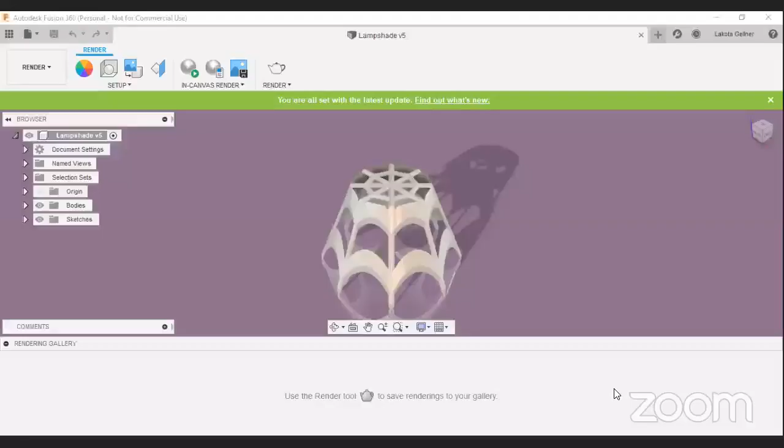Why don't you go ahead first then, Lakota? Sure. Let me try to present my screen. Can you see it okay? Yes. It looks like a crown. Yeah, upside down it does. I tried to make it look a little like a spider web up top. I was going to say it looks like a 3D spider web. Cool. Yeah, at first I was going to have just a big solid.

How big is this physically, or have you actually built it? I have not actually built it. I designed it. So what's the intended size, roughly? Let's see, I believe it's a foot tall, I think. Okay. So roughly, it's a foot by foot kind of thing. Yeah. I didn't know how big to make an actual lampshade because I don't have one for reference.

So I am curious about something though. This doesn't look like it would shade the lamp unless maybe you put paper or translucent plastic around the gap in the center. What am I missing here? Yeah, I think you'd have to put paper on. Like a shoji screen or something like that.

Yeah, I'll just explain, Eric, I'll mention the challenge. We're not actually necessarily making anything, although with some of the challenges, people do make the item. This is just to sort of get people going in Fusion, and then we just do our little show and tell, and if someone got stuck, we help them with it. Gotcha. Okay, now I understand.

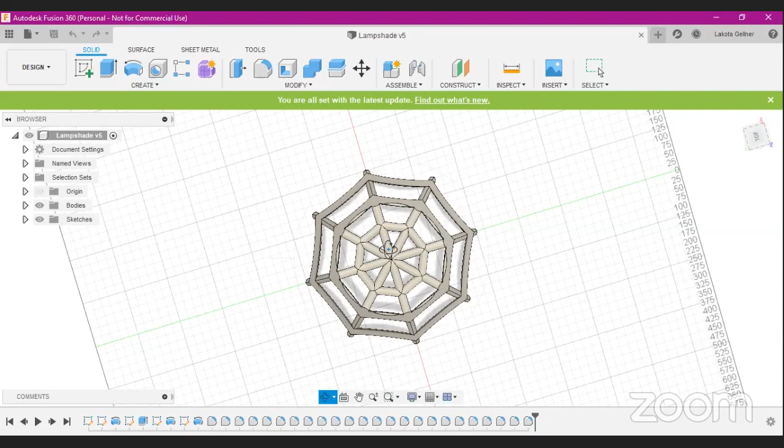You know, the other thing this looks like is the bottom end of the Eiffel Tower. It occurs to me that could be your next Fusion challenge. Cool. Yes, the Eiffel Tower. That'd be fun.

Okay, it's not exactly the Eiffel Tower. I like the shadow that it casts, though. Look, beautiful. Thanks. Lakota, I had a question. Those scalloped inner edges, what did you do to create those?

Oh, it was actually very simple. What I did, and I revised this a few times, so if I were to do this again, I'd do it in a different order. But what I did was I created a sketch up here of a spider web, which is a little bit tricky to make. I basically extruded it, and then you put spheres, and where they intersect, it creates those lines. Cool, that's interesting. I did a revolving cut too. That's a great solution, actually.

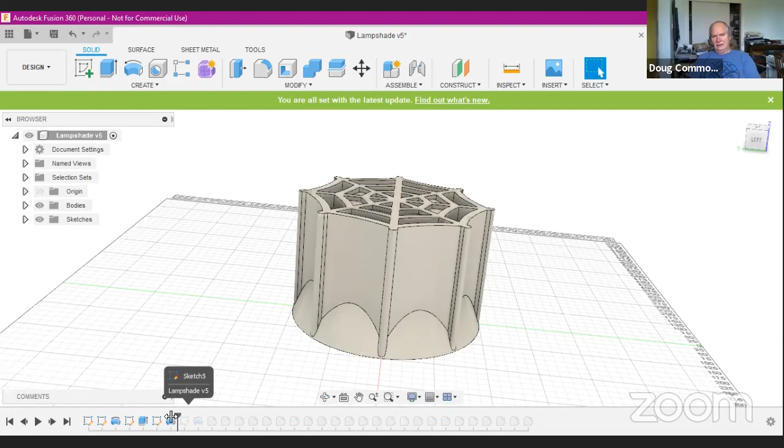So this tool is called Autodesk Fusion 360. Is this a free tool? Are we using it in free mode? Yeah, it's free. And is the idea that you can migrate design files from Fusion, for instance, to a CNC milling machine or a 3D printer at the push of a button? So is that the design methodology, the tool flow, if you will, that you guys are thinking for a newbie like me might be suitable, or is that too complicated?

Because I've been using Google SketchUp up to this point. Well, there's a whole debate on that. I think SketchUp's a good starting point. But if you're doing 3D printing, you can go straight from Fusion to 3D printing because there's a really good post processor that is almost seamless. But there is not one for the CNC milling? There is, but it's complex. It has so many bells and whistles. It's just a lot more complex.

It does sound like this is my kind of group. Good call, Darcy. This is exactly what I needed. Kindergarten for idiots. No, that's great. So I guess, beautiful, Lakota. I think it's nice.

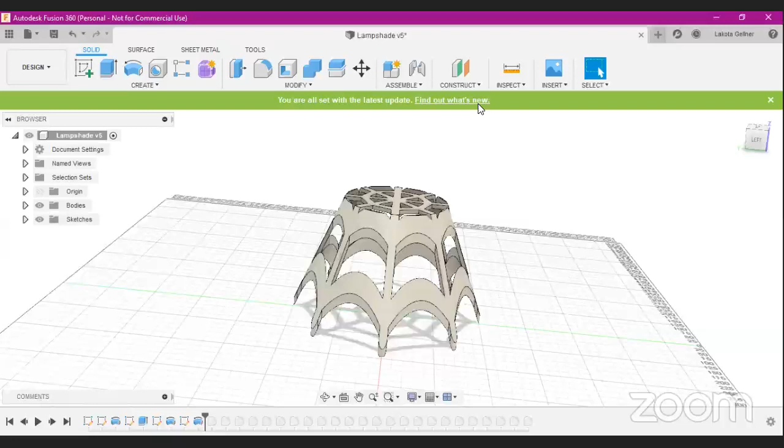So who's next? I think Isabel said she had one too. If she's there, I don't know. No, I didn't have a chance to make something. Sorry, I didn't mean to put pressure on you. I thought I heard you pipe in. Sorry, my bad. No problem. Way to make people feel welcome, Doug. I know.

Well, Dave, do you have your rocket ship shaped? What's the very top of the rocket, the emergency escape system? That could be your lampshade. So for that one, when I drew it, I actually did it in FreeCAD, not in Fusion. And it's complex enough that I didn't draw it using any of the drawing tools. I wound up writing a Python script that calculated the vertexes and stuff like that. I looked at drawing it through manual processes, and it was just going to be horrific amounts of work.

You can do that in Fusion as well. I've not had need to do that particular one in Fusion, but maybe I'll give that a go this week and I can show you guys how that's done. Because I have written some macros for Fusion. I've got one that generates nose cones, for example, which I had in FreeCAD and ported over to Fusion, so that was pretty straightforward.

So isn't the nose cone like a revolution, you just draw a Bezier and then rotate it? Yeah. But the Beziers have specific shapes, and that's really where the macro came in. You can have a simple cone, or a spherical, or the ogive, there's a lot of different shapes, and they're optimized for different speeds. So there is a reasonable amount of theory. I didn't have to get into the theory. I just went to the Wikipedia page. It showed me all the formulas.

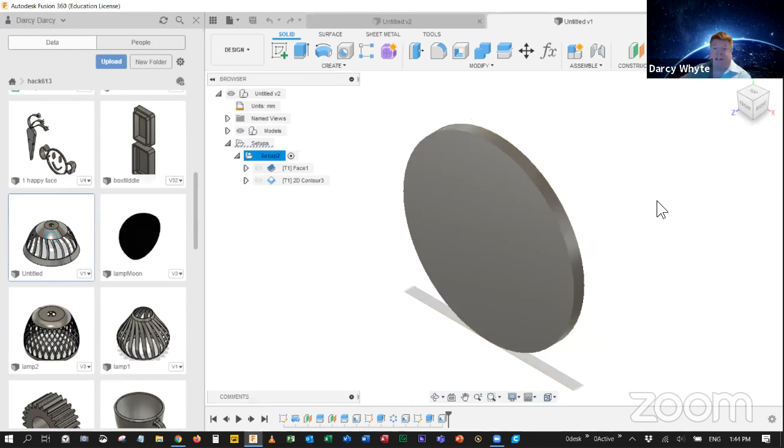A special friend. Yeah, so that was the first challenge. And then we did a dice. I eventually did this lovely one. And then we did a mug, and I did that. A gear was talked about, so I did that. And the lampshade is the one in question for today. And I think this is it. My secret project is a moon lampshade. But so here's my lampshade. I guess that's the latest one. This one looks 3D printable.

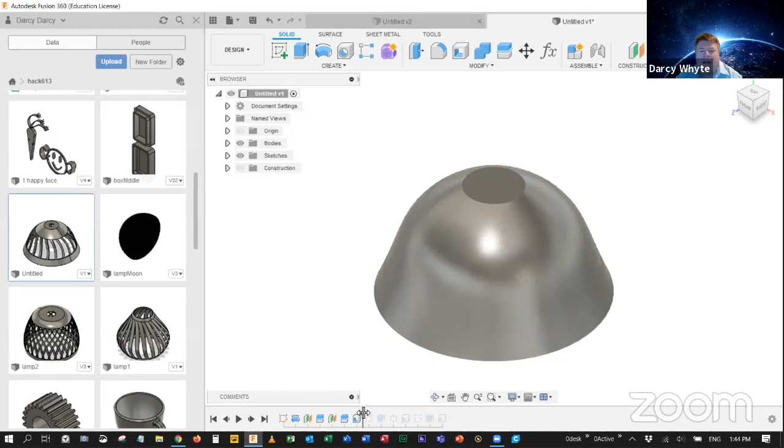So I'll just move the history back so you can see the steps here. So I started with that. And I made this by sketching and then just rotating, revolving. And then once I did that, let's see if we can see something that shows up here as I move through. Okay, I shelled it to make it empty. And then I did an extrude.

You can see I did this sketch right here, or I'll have to double click that sketch. I did a sketch like, and this is based on a tutorial I found on YouTube. So I just sketched this on a plane that slices it. And then I'm going to extrude this thing out. And you can see, if I finish the sketch, when I move to the next point, you can see that I've extruded it like that.

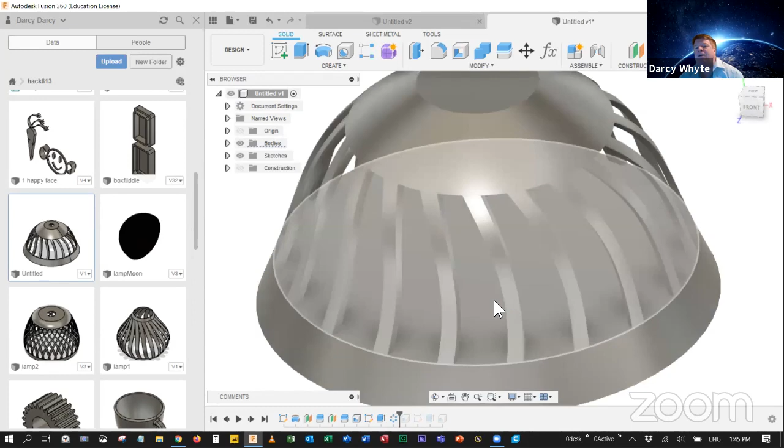And then I did a pattern of that. What's this thing called here? A pattern. And I just rotated that thing around. And then looks like I shelled the top or the bottom here and kept going. And yeah, anyway, that's the deal. So looks like I made a hole at the bottom. Is that an extrude? Looks like I shelled the bottom to get that. So that's how I made mine.

So I started by revolving to get a circular thing. And then using extrude, I made a pattern. And several YouTube videos demonstrate this technique. So I have a question there, Darcy, and I've never used 360, but do you have control over where the light source is in the rendering? I don't know, are we seeing that here yet? No? Yeah, I don't know. You must have control over that.

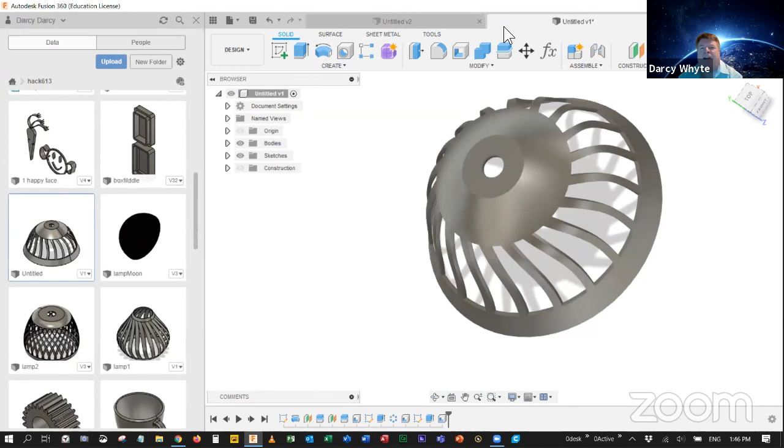Well, one of the things is when you start your sketch, like if I did a new sketch here, when you start to do your drawing, you usually start with this button over here, and you pick a plane. So even if you couldn't control the light, which I suspect you can, it's just a matter of how you orient the item that you're doing. Oh, I see.

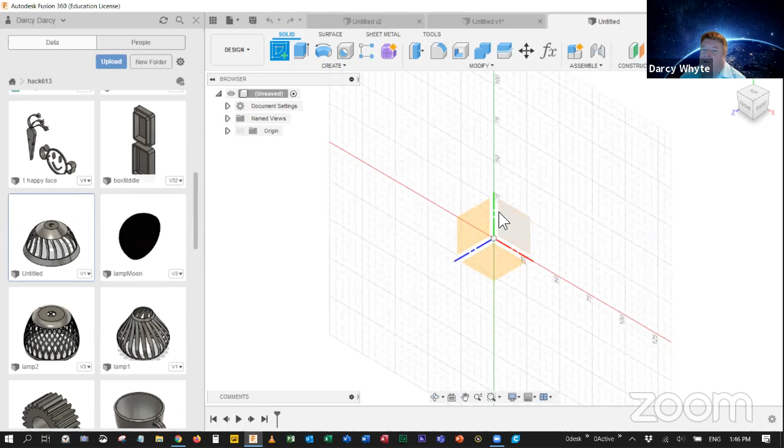And I made a pattern of just starting here. And I don't know if that's a good idea or not, just because I was in SketchUp before, and I'm just used to going to school and the teacher draws an X and Y on the board. So I want an X and I start drawing right here, you see? And then maybe make a circle like that. And then I'll pick solid, extrude, and extrude that into an object. And so now it looks like Z comes out. Yep. And the XZ plane is the floor, it looks like to me.

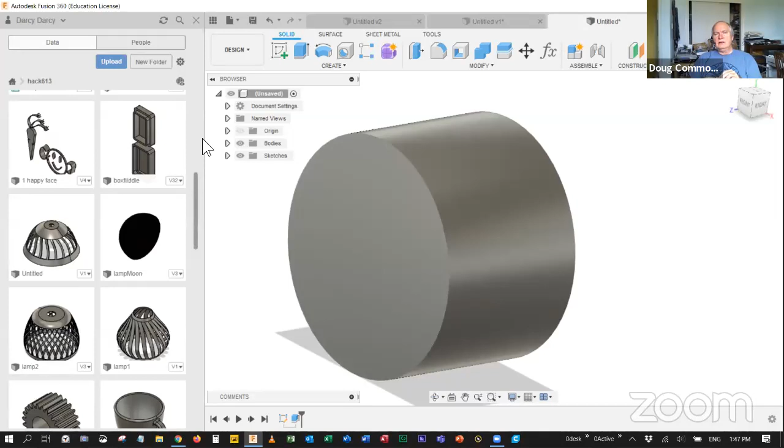So I don't know the answer to that. There is a way to do this because I've seen some really cool pictures come out of it, Dan. I think what we're looking at is the CAD part, but then there's another tool that you can pull up, and it's under design, I think. The design button up there. I'll be doing a little render later, Doug. Okay, let Ray do it. Ray's way ahead. I'll let Ray have the floor then.

Quick question. This Fusion 360, I was just checking on the web. It sort of implies it's cloud-based. Do you actually run it on your machine or is it running in a browser or something? A bit of both. It's kind of a hybrid. If you're generating forms, then it'll be in the cloud. But some of the more rudimentary stuff is on your computer. Some of the really heavy stuff, your computer won't handle it. Oh, really? Okay. But you'll be a while before you get to the heavy stuff, presumably.

Well, what I'm getting at is, do you actually download and install an app on your computer, or is it all running inside a browser? Yeah, there's an app. And it seems like it was saving to the cloud. Yes, it saves in the cloud. Is that the same for the local save? The local save self-deletes in like 60 or 90 days or something. I noticed you can export, they call it archive, and it saves a local file. But I bet that will be your own problem to manage in your own file system.

I don't trust Autodesk as far as I can throw them. I'm reluctant to invest time learning that tool. It's just one of those things. We all have those feelings, but they're offering so much. When you get into it, you can make some interesting things that we were finding challenging before. So they can take all my files away and I'm still ahead.

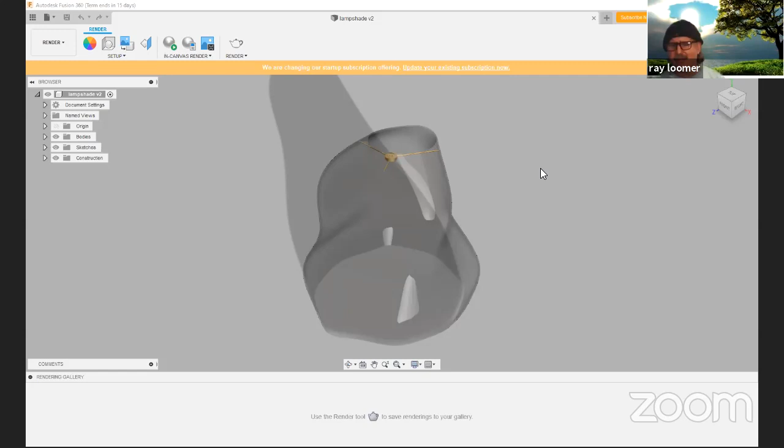Is this supposed to be a lampshade shaped like a potato? What's the shape that I should recognize? I sort of went with an organic blown glass shape. And I used a different set of features than most people use. So instead of walking you through this, I'm just going to start with a new design and show you what I did. I used a different mode. I used the form mode. So I clicked here, and I picked cylinder, and I picked a plane.

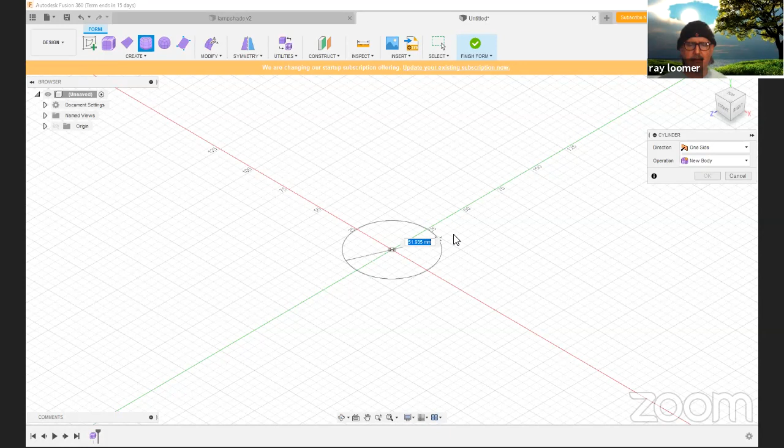So what I have is basically the idea of the lampshade right there already. So I can adjust this width-wise. I can adjust this height-wise. And if you see this little thing here, I can adjust how many segments it has, which is kind of important. And I can adjust the segments this way as well, because every segment, every intersection, and every line is manipulatable.

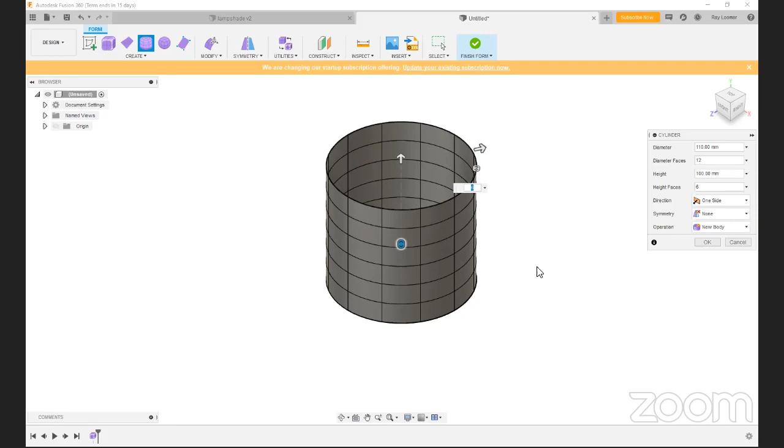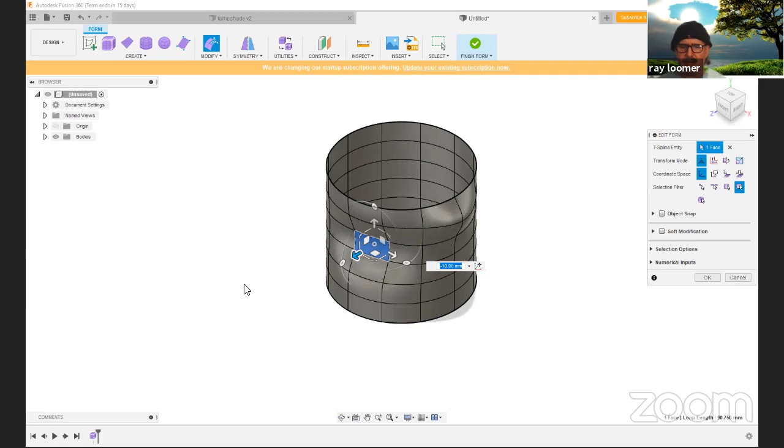Right. So then you start tweaking all the intersections to get whatever bizarre shape you want. It splines the rest, does it? Right. So this is actually just right click, edit form. I pick something and I just pull on it a little. Gotcha. Or I pick a whole plane and I push on it a little. So I end up with like a blown glass shape, very easy to do. Or I pick a line and I pull on it a little.

And there's a lot of modifiers, like crease. If I put crease on this one, and then I edit the form. This feature should be called "How to Make Something Brand New Look Dented and Old." Yeah, this could be a pop can that's been around for a while. But see, when I put the crease modifier on it versus this one, it's quite sharper. So there's a lot of different modifications that I could do.

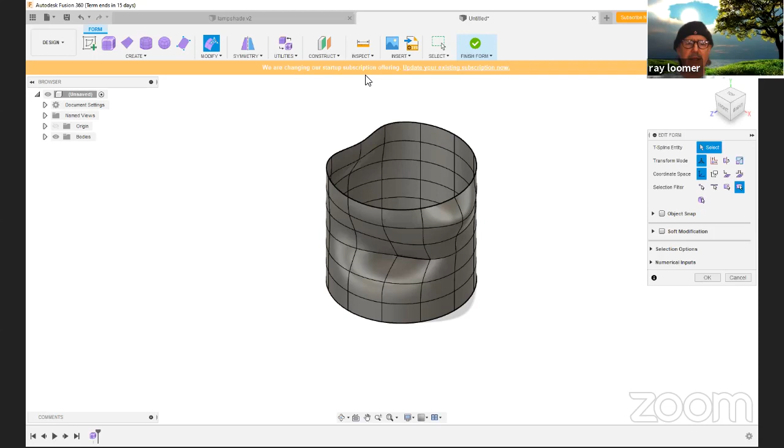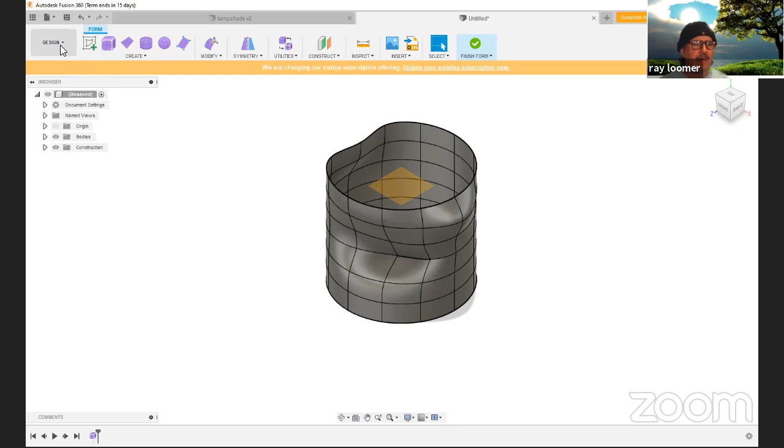Then I did the offset plane. Again, offset plane, brought it up. Did my sketch here with the 3 bars and the hole in the middle. If you want me to go through that, I will, but I think that's been covered in some of the other ones. So this is a feature that people don't usually use. And when I go over here to design, I can go to render. And I can, well, actually, let's go back to design.

So I can go into modify and go to appearance. Come on, here we go. And one of the appearances is glass. And for example, I could just give it glass. Use that. So presumably that's supposed to be glass, but anyway, that's better looking glass. So all I did is I just modified it so it looked like a big blown glass lampshade. Now, I'm going to start a new design again.

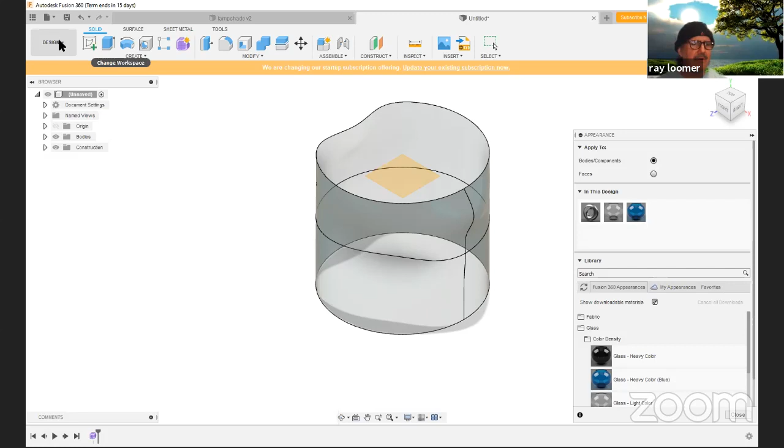The interesting part about this is if you want a box for something, you could just take like a box. You're making a box for whatever device that you have inside. Okay. Something's happened. Try that again.

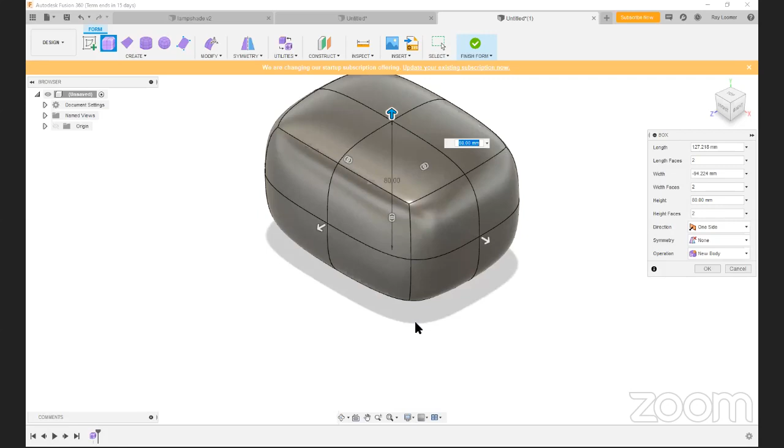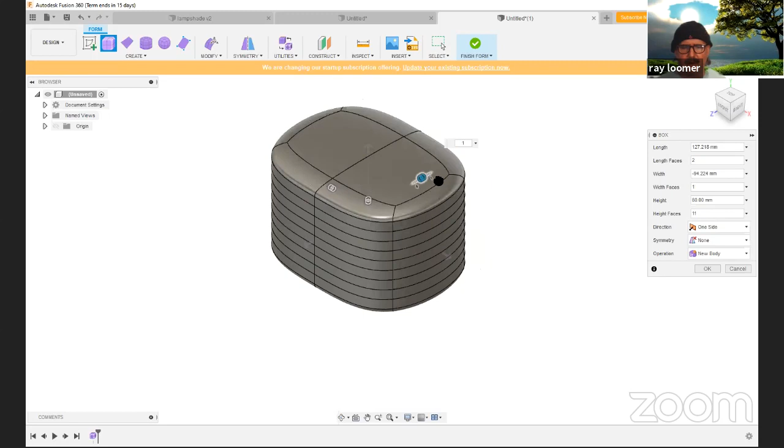So in create mode, you end up with a blob when you pick, but you can make it almost a box by increasing the number of segments. Mm-hmm. But if you really wanted a box, then you'd probably stay in the regular design mode. But you can get organic shapes. If you make something and you want a shape that fits around something, a shell, then this might be the way to go. And again, you can modify this.

Oh, come on. Oh, wow. It's a stick shift. An anvil. An anvil. Yeah, or an anvil.

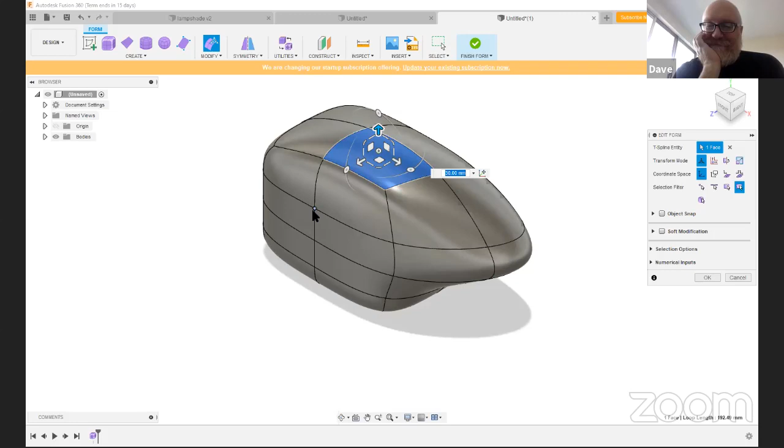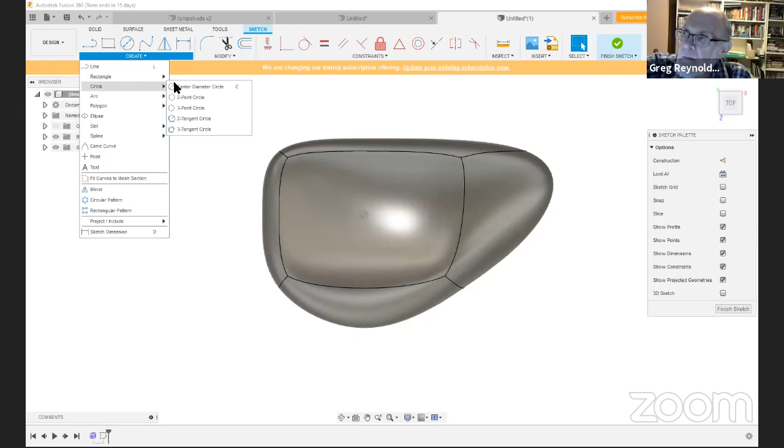Yeah. But then you can finish form. And what this does is it creates a body and you're back into the design. So you can do your normal stuff like just create a sketch. Say center circle. So now you've got this hole through it. So it's just another body where you've created a very organic shape.

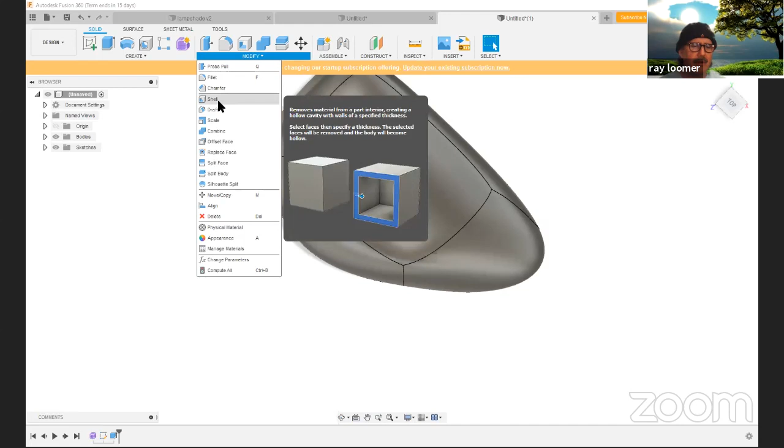And so you can create a box, or if you use the shell command, where is that? Here. I'll pick the hole itself. And now it's hollow. So that could be like a box for a piece of electronics or whatever. You could 3D print that and it would fit around. It's very slick. It has a great presentation overall. You put the holes where you want them for the knobs or whatever. And I think that's printable and you could do it in sections. So I thought that was an interesting feature to bring forward. Yeah, for sure. Awesome.

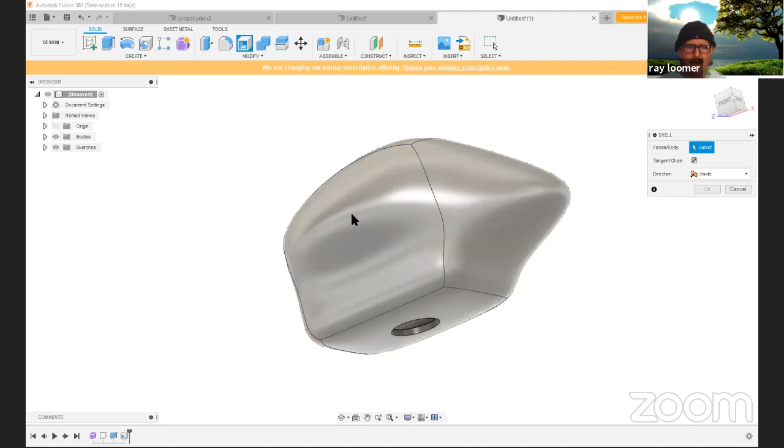What about more complicated things? Like, could you put threads into that hole? Yes. Ray, where'd you specify the thickness of the object? In shell, modify, where is it here? Oh. Up. Up. Yeah, there, it's the first one. That's why I didn't see it. So I pick a, okay, let's. And it's just asking you to type in a number there. Oop. Okay.

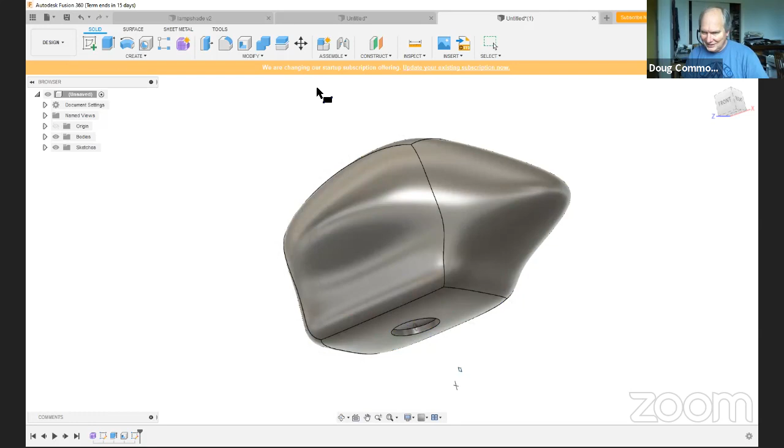Yeah, okay. Modify, shell command off of this end. Okay, see, as soon as I click on the surface, I have that little dialogue. So, okay, right. 2 millimeters, it'd be 2 millimeters. Okay, wow. 5 millimeters, it would be 5 millimeters. So really, really quick. And I can pick more than one surface. And so then you can have multiple holes going in. So it's a slick little trick.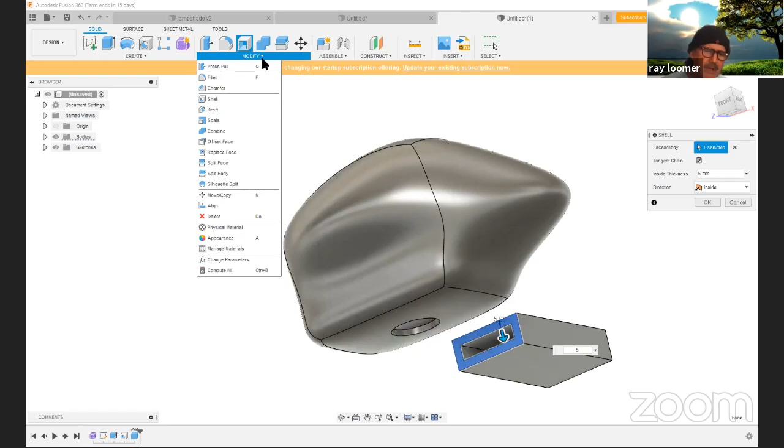And someone asked about threads. There is a thread thing. Let's see. Also, when you do hole, you can do thread too. Oh yeah, there it is, thread. Okay. So you click on thread, you click on the edge. Whoops. And would those threads be 3D printable? There's two different ways to do it. You can just have a decal on it showing a thread, which is good for some applications, or you can actually have the 3D printable thread, the actual thread in the design.

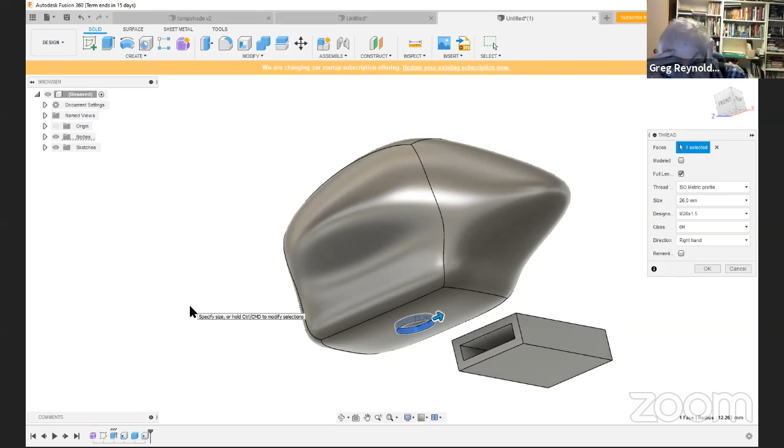So there's two. Yeah, there are some good YouTube videos out there for creating 3D printed threaded parts. Because I was thinking as well, if you dimensioned it correctly, you could maybe clean it up with the real tap afterwards to get better quality threads. Well, for fine threads like that, you're probably going to be disappointed because 3D printers don't have the resolution. In that case, you're just going to cut a hole and then use an actual tap. Yeah, exactly. But at least it would be close, and you wouldn't have to be removing so much material, or if it's in a difficult place, maybe to be able to tap it.

Yeah, another common thing for threads with 3D printing is you can get brass inserts, and you use a soldering iron to put them in because it heats the plastic just enough. That gives you a brass piece that's going to hold your thread, so it's a lot more reliable. And I guess they're reinforced on the outer edge so that it has a good physical grip to the plastic. Yeah, I use that on my rockets all the time because I have the electronic sleds that hold the electronics to control the rocket. And for those, I use the brass inserts because I don't want those things flying around.

It's surprising though. Oh, sorry. But the 3D printed threads work better than I would have thought. Yeah, it depends on your application. I got some right here. See, I made this thing just yesterday, and you can unscrew this piece, you see. So it's really sloppy, but for this application, it's fine. Right. It really depends.

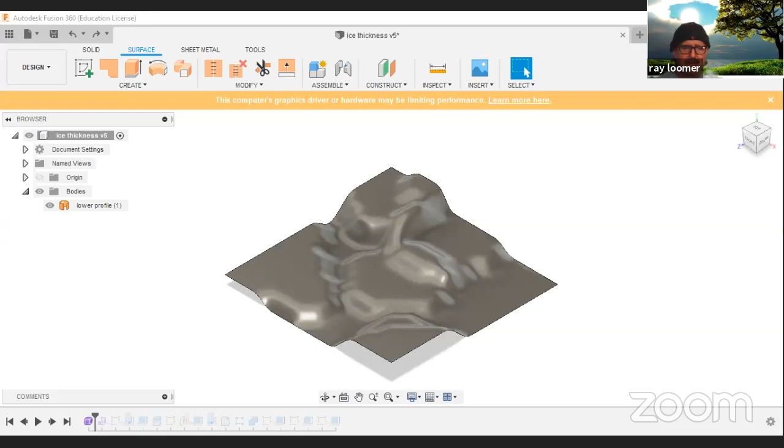This one that I'm showing, I had to make a topographic map. And I used the same tool. So I work in science outreach and science education. We were making a science kit for high school about climate change and measuring the ice thickness. So we wanted to simulate the surface of a lake, with a layer of water and then a layer of ice on top, and how you would extract a cylinder and how you would measure the ice thickness.

Yeah, so it's the same tool that was just shown. So I started with a grid like that, and then I pulled up some parts to make different thicknesses. I made this a while ago, so I won't remember all the details necessarily. Then I did another one.

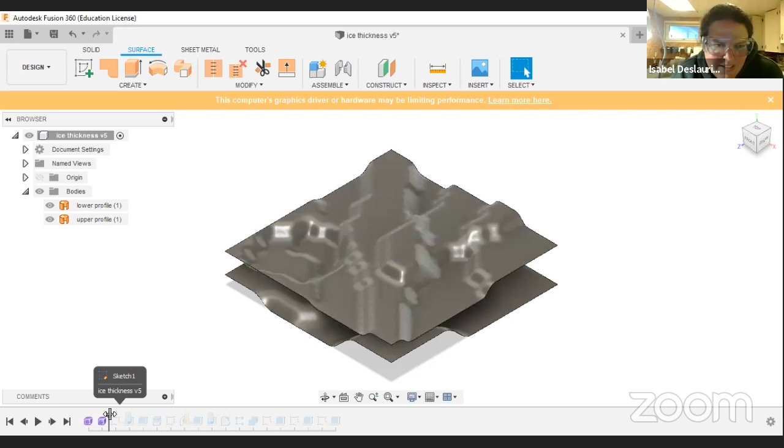Whoops. Spoiler alert. Yeah, so I made another one on top, so I'll visualize it like that. Let me show after. Then a couple extrudes after, so you can see the bottom was supposed to be, like, I printed it out blue for the water, and then the top part was white. So the kids couldn't guess. Like here, it looks like it's very thick, but maybe the blue part is very thick and the white part isn't as thick. And then I started to work with more of the standard tools that we know.

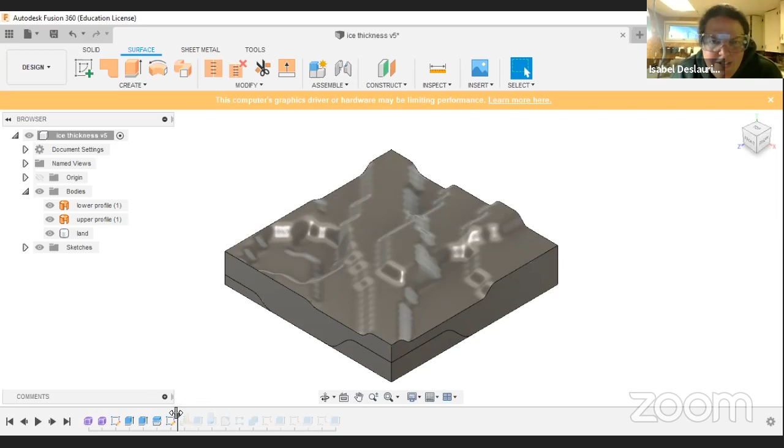So I made little pegs sticking out and a cylinder that cut into it. Yeah, so I ended up with these. Let me turn off a few bodies here. So you can see I had these little bodies like that. I kind of forgot what I named what, but you get the idea. And I numbered them. So let me turn back everything.

So at the end, you ended up with these 9 little cylinders that you could pull out, and you could see the different layers inside of different colors. And they were supposed to find what's the safest path across the ice based on those cylinders that they pulled out. But for me, that was really the project where I learned a bit about that different environment that Ray was showing, because you needed that organic shape.

And you actually printed these? Yeah, hundreds. How long did that take? Because you're using different colors too, right? Yeah, so there's 2 offices that work for the same organization that also have a 3D printer. So usually I design it and then we distribute it across the offices, and different people print different parts. But it must have taken, I would say, 3 weeks.

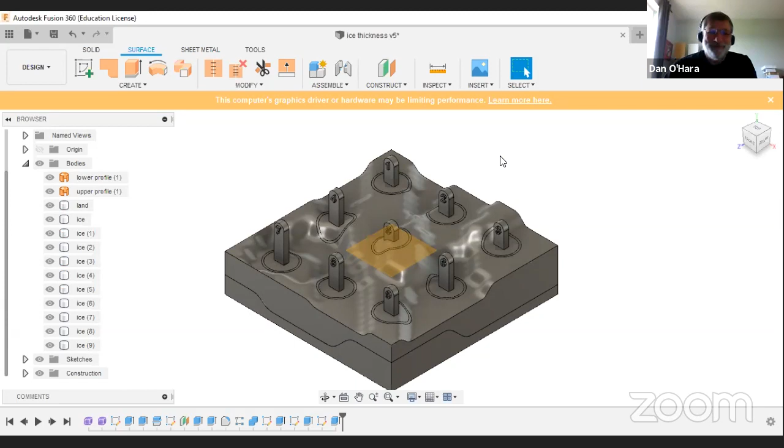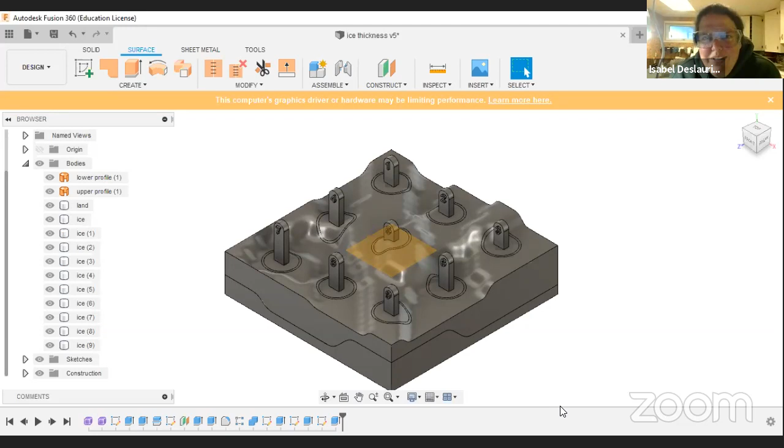Wow. Yeah, but it's really nice for some of the kids that we do in schools. The original idea that was proposed by the group we were working with was to do this with a bowl with water in it, and then you put shaving cream on top, and then you take a sample. It sounds like a good idea, but thinking about the practicality of it, we could just see how much of a mess it's going to be. So with 3D printing, we've really been able to do a lot of custom educational stuff like that. Anyways, just another quick example to show the relevance of the tool that was just shown.

Very nice. Oh, that's awesome. Isabel, what grade was this? We did it for grade 10 to 12. Oh, okay, high school. Oh, wow. Yeah. But in general, it's from preschool to end of high school. So it just depends on the topic.

Beauty. Any other show and tell or calls for support or help? I'll take that as no for now. Feel free to interrupt if something comes up soon.

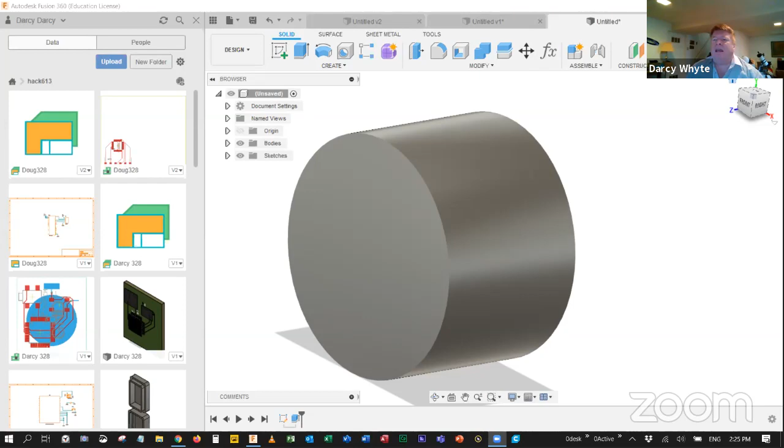Okay, so I'm going to share my screen now so that you can see a picture. I'll just put this aside for a minute and compare a couple things so you can see. I'm making this as a broad recommendation that it's an affordable machine that anyone could start with. So I go into my printmaking here. I did this project the other day for fun with this in mind. I made a thank you card, and I was showing it during our social earlier. In the design file, I used Inkscape, as you can see here. It's just popping up. Did I double click it? Yeah, I guess I did.

So this is a nice, good sized desktop machine. It's called a 6040, and that whole box I just selected is a 6040 size machine. I've got one of those machines, and I'll show it right now. This is a 6040 right here. See that thing there in my other camera. There's one more size after this that you can fit on your desktop, called a 6090, and that's almost a meter of cutting area.

And now here's where the rub comes in. A good 6090 is about $5,000. You can get a low end one for say 3,000 or something like that. No one wants to play with that money, and it's a massive machine. You can't pick it up by yourself. Even this 6040 I have, I wouldn't pick it up myself. I've done that before, a few years ago, and I'm still paying for that. So anyway, that's a 6040.

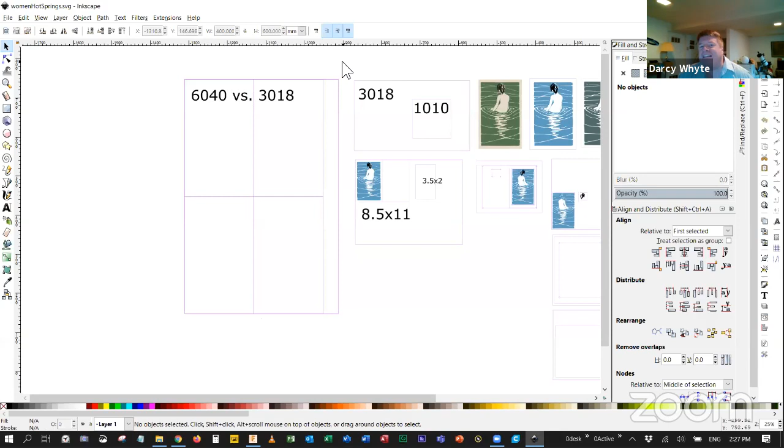And there's the 3018 size we're talking about right now. It's like a quarter of a 6040, right? So that's the work area we're talking about. Now, the reason this machine is so nice and light is because the smaller you make it, the lighter it can be. It goes up exponentially, or with the cube, I guess.

Because when you imagine, if you make the machine longer, then the members start to eventually bend under stress. So you've got to make them bigger, but not proportionally bigger to the size you're making it. This thing gets heavy. Like this 3018, I can walk around. I can carry 2 of them just in one hand by putting them together, grabbing the 2 beams and walking around with it, no problem.

By the time you get to a 6040, you need 2 people minimum, and a 6090, you need 3 people to lift it, because you're really working when you're lifting these things. So this size is just such a nice size that it becomes portable.

And other common sizes. So 3020 is another size, and oddly, those machines are usually made very heavy. I had one that weighed about 60 pounds. I don't know what my 3018 weighs, but it sure doesn't weigh that much. And it's plenty rigid. I think you could do aluminum on this thing, plenty hardwood or anything like that, as long as you're not too greedy about how fast you want to get things done.

Another common size is 3040. They're also a good buy. I think the 6040 and the 3040 are two. The 3040 is about the biggest you can lift up by yourself. That's just designed for one person to carry.

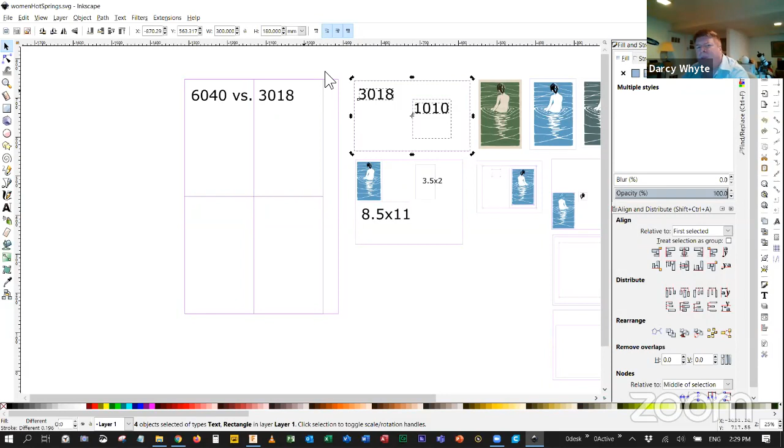So anyway, that's sort of the size we're talking about, and that's a limitation of this machine. At 3018, you're going to be limited to what you can get into that machine and cut. And that's just one of the payoffs. If you want to go bigger, the weight and the price just goes up with the cube of the size, basically.

And what's an example of what you'd need for those sizes? On the 3018, could you not just take your project and build it as smaller parts? Absolutely, just make it in parts, right? Where would you have to have a 6040 in order to do it, where you couldn't do that? What are you missing out on by only having a 3018?

You can make a big part in one shot with the 6040. Even when you're making smaller parts, just having the big bed to work on sometimes can be really handy too. I even use it to put tools on. I shouldn't, but yeah, that's really it. It's a lifestyle. Here's another one though.

Now on the smaller machine, you're going to need yourself a jigsaw to get the pieces broken down to put on it, and all that. So I just did a fun...

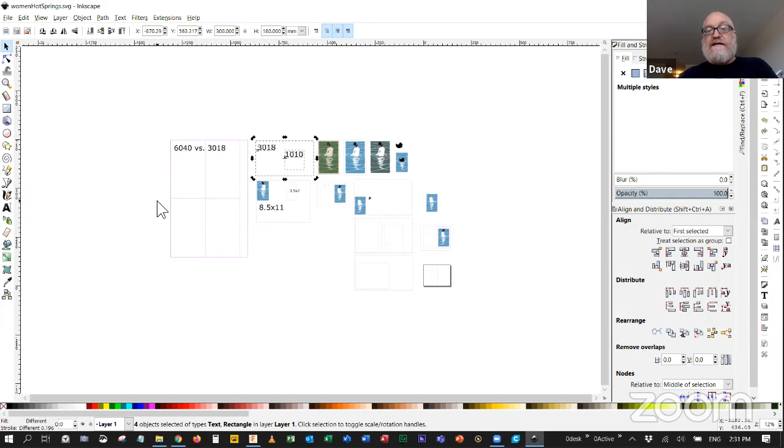Actually, Darcy, before you go on, I want to follow this thought through a little. For example, when I was building my Saturn 1B, I had centering rings that were about 30 centimeters across. So with the 3018, I'd have to do half of it, turn it around, and then mill the other half. How easy is it to get it lined up correctly? That is up to you, on what kind of fixturing, precautions, techniques and tactics. That would come from practice.

If you're really serious, I think the 3018 is a good deal, and it's almost a no-brainer. Anyone can get into this game. Let's take the worst outcome. You buy yourself a 3018, you pay $200 to $300 or whatever, and then, oh my God, I don't like CNC. You put the thing on the market in our community, you probably get most of your money back. So you're not really exposing yourself. Especially if you have it assembled already. Yeah, it's like, hey, I'll take it.

Yeah, so I think that, not to judge people's own economics, but at these price points, when you're talking just a couple hundred, $300 to get a whole kit together, I think that you're not exposing yourself to too much risk.

It's not like going out and buying a 6090, a nice one. You can buy a nice 6090 for like 10 grand. You can get yourself a beautiful one. But I mean, you're really getting into some heavy change there and space requirements. Whereas this thing, 3040s, I'm looking at the prices here. You're looking at around 600 for those.

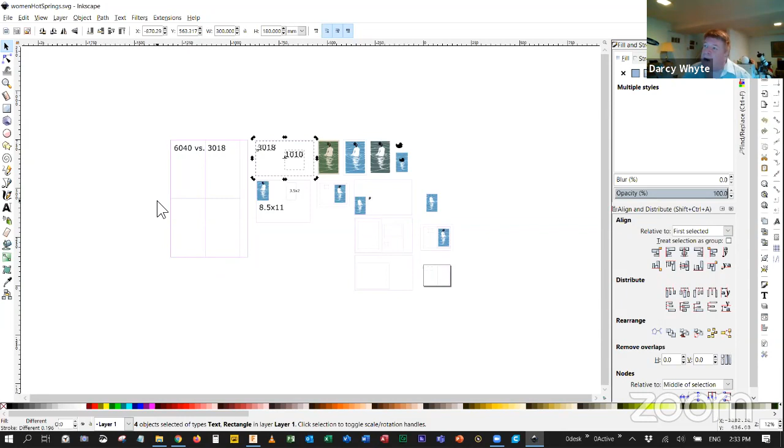Exactly. And those are heavier built machines too. I noticed that for each size, there's a general way that they're usually constructed. Mostly, there's exceptions, and it seems like the 3018 and down, they're made out of this extruded aluminum stuff that we're seeing here. And above that threshold, as soon as you get to 3020, they start making them out of much beefier materials. It's probably to do with the geometry and how much flex is usually allowed and the price points of all the different sizes of the materials.

But I just made this project, which I found really inspiring, to make this lovely thank you card. And I even made the fixture. That helps me align the prints because, you can see here, I'm printing the blue area, and then I print the hair as a separate. And here's my jig for doing that right here. Here it is, you see? Yeah, so I actually made it, and here it is.

And so what I do is print with this, and this is just a printmaking project. Not everybody will like printmaking, but I know a couple of us are a bit interested in it. So I made this frame. You can tell I had a problem when I was cutting it. But at least I got the center part right before it screwed up on the outside, and I don't care. So you put your cardstock in here to make your nice thank you card, and then you put the frame on it like this, okay?

And now you ink up this block, which I carved, and you put that on there, and then you can either jump around on it for a while or put it to a press or whatever you like, and you take it off. And then to get the hair in place, you just flip this over like this. See, it fits this perfectly. There's no gaps or anything. It's a very satisfying thing. You ink up the hair and you stick it in the hole. And it's so small, you just press with your finger and you get enough force to transfer the ink.

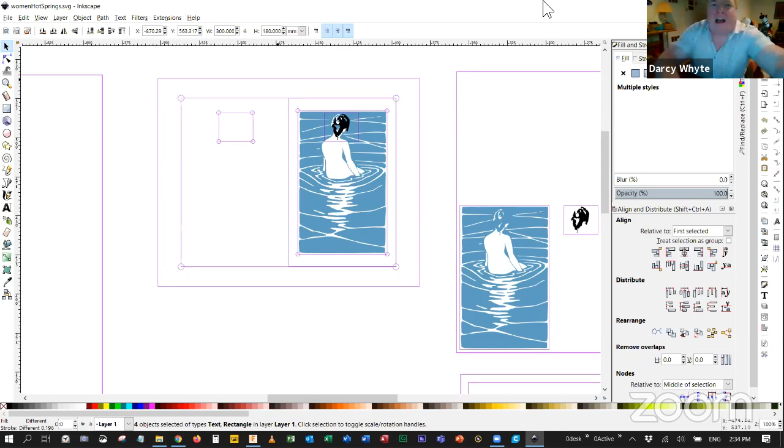So this whole thing, I could make that on a 3018, no problem, you know? So if you wanted something bigger than this, you could just see how it fits up on the screen here. Yeah, I'm on the share here. If you look, there's your 3018 and here's my project right here. You see? So if the project was much bigger, it would be rather inconvenient. You'd go to a bigger machine.

Even though I could make a 30 by 18 print, if I want to make the fixture, I got to make it in parts. And that'll just be another hour of thinking about how to do it. So it's like a lifestyle choice. Now, my angle is, if you're serious and you're gonna have fun with some CNC, I have a bunch of CNCs. So you can have one machine busy, you can go on the next one. And these little 3018s are portable. I can bring them to meetups, and next summer I'll be bringing them to the park.

We'll be doing picnics. I literally have a Honda generator. You can actually see it on my screen down there. I think that red thing down there. Oh no, that's garbage. It's just a little further over. There's a Honda generator.

Anyway, that's part of my thinking of why I think this is a particularly good opportunity to get a CNC machine. Because even if it's too small in the long haul, by the time you use this thing for a while, you'll know what you want more. You'll be making stuff and you figure out, do I really need something bigger? Do I not? Do I need a heavier machine for doing aluminum? You'll be able to answer those questions and you'll know what you need.

And in the end game, I love having a 3018, even though I've got all kinds of other heavier, stronger machines. To me, I see it as low risk. That's why I was going to advocate for this. Now, where to buy these? That's the next thing. So I'm just going to bring up a web browser here.

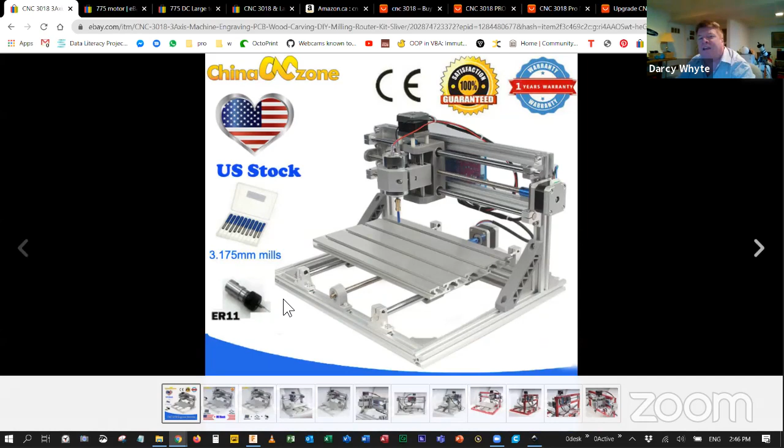So even buying, see, okay, here they're showing it off the side. I bought a machine once that showed like this, but this thing came installed, so I was good. I bought two of these machines. That's how much I like them. But yeah, so that's about it. They're really easy to put together, like 2 to 3 hours if you're really on it.

And so what I'm thinking is if everyone wants to buy this or a smaller one or whatever, I'm not talking about a group buy in the sense that one person's going to put out a whole bunch of money and then become like a secretary and try to gather it all from everybody. I mean that we'll all help each other and say, these are the types of machine I'm thinking are a good buy. This is what I'm advocating for because it's low barrier to entry. And then we'll host some build parties. A bunch of people get these, we'll hang out, drink some beer, put the parts together, and then some parties to get them running.

And I've already got a workshop I'm planning on how to carve up these fancy blocks for doing printing. That's a fun application. And hopefully maybe Ray has something, maybe Doug will have something to share. So anybody who goes along with this, you're going to be up and running with a CNC pretty fast without putting out too much money, and low risk. Because let's say, oh, damn it, I hate CNC. You post it in our group and somebody will probably pick it up. I'm not guaranteeing that. It's just that for the amazing stuff you can get done, I think it's a good angle to go on.

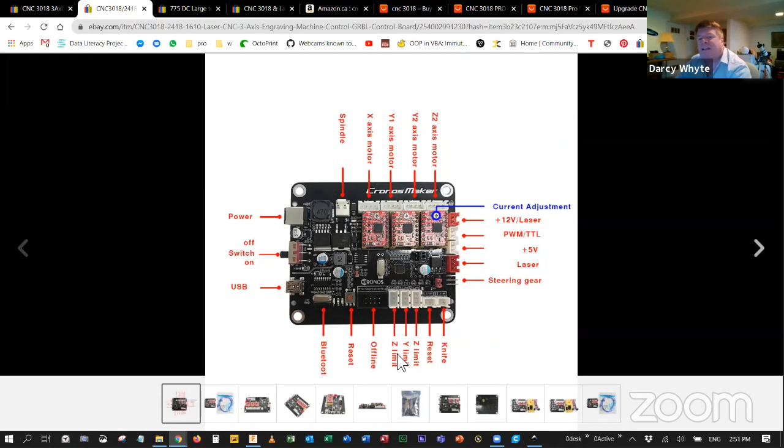And you just do your business from there. And there's all these extra pins, like if you want to do a probe, go around probing the surface to see level, and then adjusting your G-code to follow the contours. You want to make a circuit board like that. I've used the probing on these machines. It does work beautifully. And if you want to have XYZ limit switches so the machines can self-home, they don't usually come with that, but all the pinout is there for that.

So that's your architecture. And another beautiful thing why I personally like these as a portable fun machine is they run off of a laptop brick. So the whole machine is everything you're looking at right there. And all there is to tether off of this thing is one line that runs from the USB to your computer, and another line that runs to a brick you plug in the wall, like a laptop type brick. You can walk down the street with it. It's a lovely portable kit.

Darcy, sorry, I'm not familiar with exactly what you're talking about here. What's the power supply? You said there's a place to connect the power. What voltage and current? 24 volts. And current, you're running steppers and a little spindle. I'll look at mine right here. So here's my brick. I'm just gonna look for my glasses and I'll tell you what this thing says for power. So any 24 volt, right? If you had a lab supply with 24 volts, you wouldn't need this, right?

I'm looking at mine now, and it says input 100 to 240, 1.3 amps input at 120 volts. Output 24 volts, 5 amps. Turn off the screen share so we can have a closer look. Okay, put up the camera. Oh, okay, brick. Yeah, so it's just a brick. It says 24 volts, 5 amps. It's any old 24 volt supply.

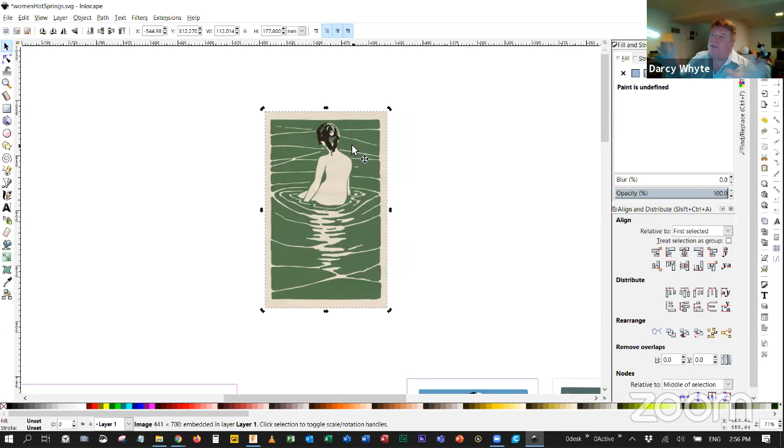Okay, so here's a JPEG that I found on the internet of this lovely print. I think it's a beautiful print because it's just two plates, and it still has so much depth to it. And so I would just simply take this JPEG, and go in Inkscape here, path, trace, preview, and there's my first plate already ready to go. Wow. Because it traced it. It converts the JPEG, and this is something that Inkscape can do. And then I'll just say OK. And as you can see, when I exit here, that is a vector image now that I can work with.

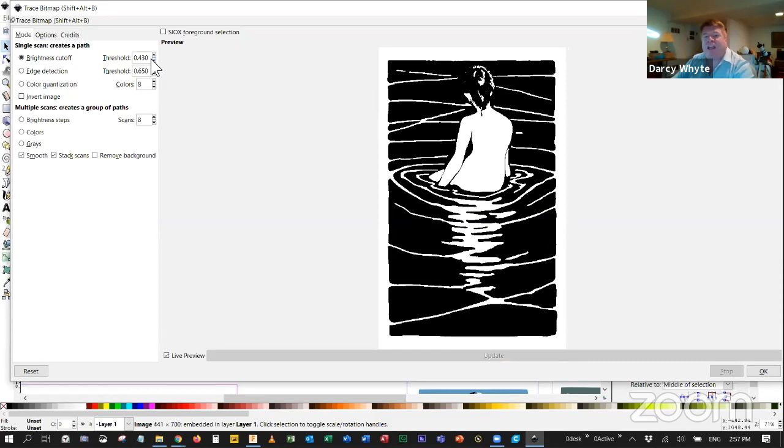Now I'm going to trace it again. Path, trace bitmap. Now I'm going to change the sensitivity so that I'm only seeing the hair. And then I will ask for the removal of the specks that are any smaller than that. And then I'll say OK, and then close it. I may have done this twice. No, there's the hair. So I pick this one. I pick a lovely shade for that. So let's go with this blue. Ooh, that's no good. Maybe we'll tune it up there like that.

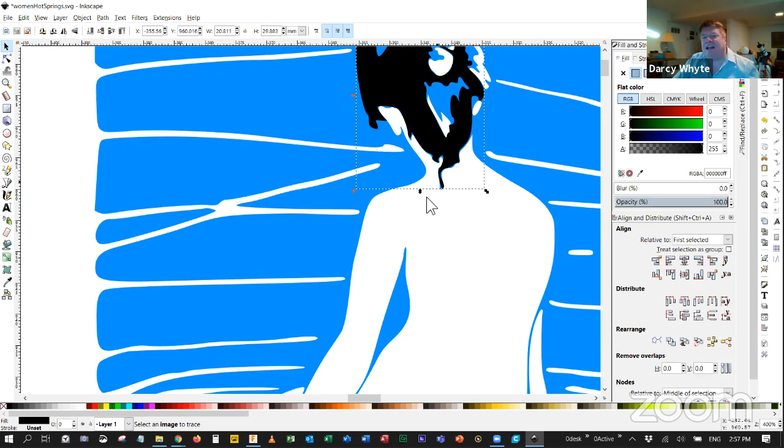And you see, now I can put down one ink stamp and then another ink stamp. Better move it on the top page up. Now I just have to slap that on there to make sure that it's roughly lined up. And there's your print, you see? So this is the first design phase that I happen to have done in Inkscape. And then to make it work a little nicer, I'll make a square and I'll take the fill and put a stroke on that.

Now Inkscape's another thing to learn. But I can do this to make a fence. So this could become the outside cut where I'm going to actually cut the block out. So this becomes my printing block like that. And then I would save this file and go from here. Now, some people would make their G code right in here. These machines run G code. Almost all CNC machines run this stuff. And so I have to convert this to a CNC format.

Some people, and I don't do this, will go to extensions, and then you see G code tools. You can sort out all this stuff. This will create the text file that you load directly onto your CNC machine. But I'm using a third-party product that happens to be called VCarve Pro. And that's just what I'm using myself. And so, you would open the file in here. And actually, why don't I open a file?

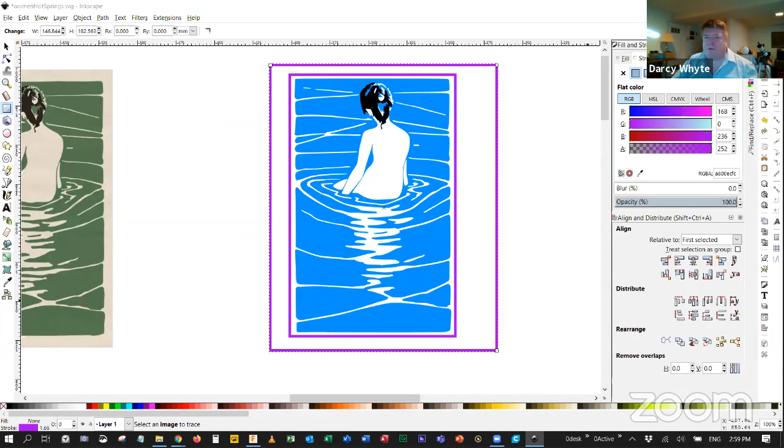Let's say I want to cut this piece out that I have. Where is it here? There. Let's say this is my final work, and I want to make this plate. Well, just to make my life a little bit simpler, I'm going to do the document properties here. Select this. And this document properties lets me make the document be the size of that item right here.

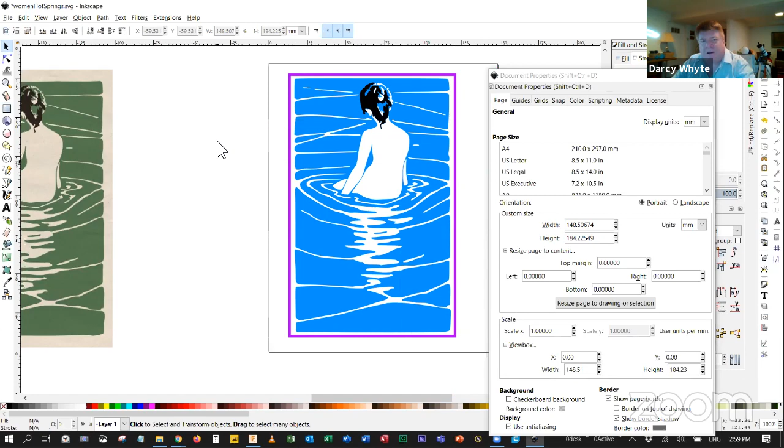So there's a button here. And now I don't know where that other circle came from. Oh, I got to go. I see. I want to be on this arrow, then select, get that off of there. I want to select this and then say resize. You see what's happening? This is my whole document now.

And then I'll go file, save as copy, and maybe I'll put it on my desktop. You can put it as a PDF or just leave it as an SVG and it'll probably be okay. So just leave it on the desktop. Now I'll close that guy. And I just created a new file in my desktop, as you can see.

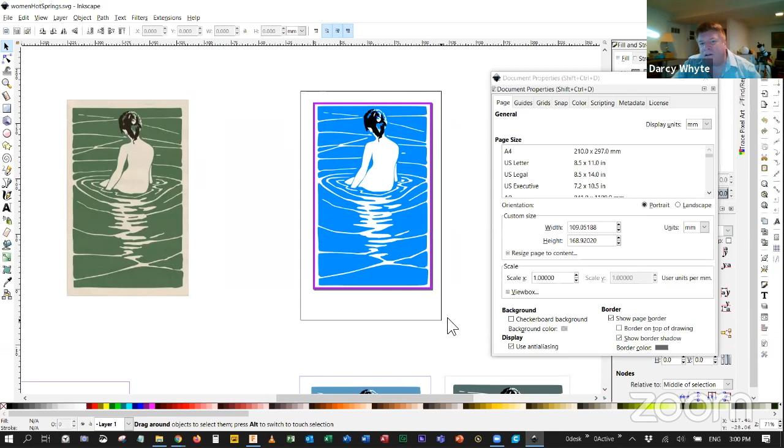I just focused on just the, oh. Oh yeah, I forgot to delete everything else. But in any case, the outline of my document is right around here. And the next stage of the process will know that. So I'm going to take this file that I just made in Inkscape right here and bring it over to my VCarve Pro.

And this is a personal thing. Everyone will have their own G-code method. Fusion can do this as well. And I just haven't done this exact job in Fusion before. That's up next for me to figure out how I can do this particular job in Fusion. I saw a YouTube video the other day, but I haven't tried it yet.

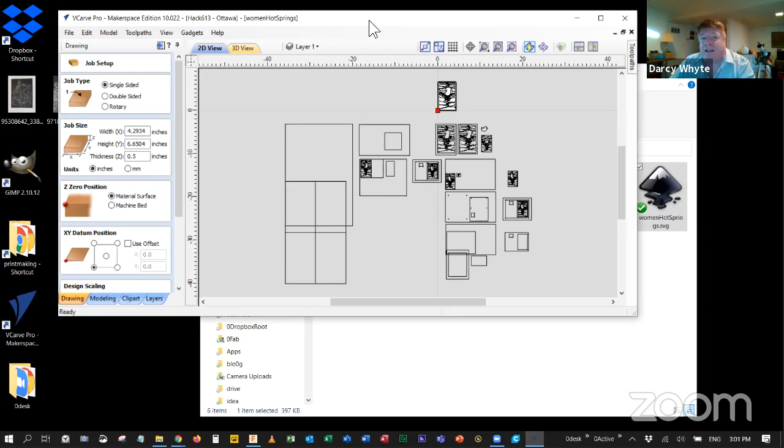So in here, there's lots of options. Like this little option right here says, when I start the job on the machine, the little pointy thing that's going to cut, it'll be at the lower left of my workpiece. So I'm selecting where my 0, 0 is in my eventual work. And I'll say, okay. Now there's the work. You can see it's white.

Now in this software, the left side is a CAD side and the right side is CAM. So I'm going to go over to the CAM side over here, and these are all the different tool operations. And so, just to be simple here, let's say I have some nice, cute little tiny pointy cutters, right? Like maybe I've got a 1/32 size cutter on hand. Well, I would just pick one of these tool paths up here to do that.

Now the hair, I'm not going to do this time because that's the second plate. So I'm just doing everything but the hair. I want to clear away everything that's sort of starting right in here, all those lines, basically. So everything that's inside this outer square, I want to clear until it reaches another line. That's called pocket. There's a pocket operation.

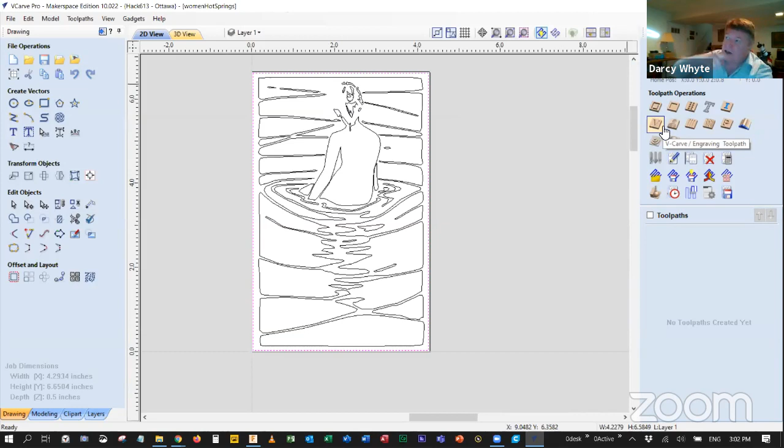And if I want to do really fine work, I could put a pointy bit on called a V-carve, like a V-shaped bit, and then you choose the V up over here. And it'll actually make a tool path for the machine to follow to do the work. So in this particular type of work, I already know what to do. You just select everything and you pick the V for V-carve.

Now I happen to have a V bit that is 1/8 inch. So it's already been pre-selected. It can be a tool library over here. Keep a library there of all the tools that you keep on hand so that you can assign the tool to a job. And once that's done, I would pick all the options here, but I'll just calculate that thing. Continue. And there it is.

There's the little V-carve. This is the path it's going to follow. So I can put this at an angle like that. And you can see that it's going to remove all the material. What's that, Ray? What's the time on that? Oh, for the time, let's see, I'll go over this, and there's a time button right here. You hit this button, and we are looking at 53 minutes.

But this is assuming a certain feed rate. So you'll notice that in the V-carve, there's an edit here. This is assuming I'm going at 40 inches a minute as a speed. And that'll be your own business, what you put in there.

Some machines can go faster than others. These little guys are pretty fast if you tune them up after you get them, and just as fast as any of the other larger machines, because you've seen 3D printers, they can whip around, right? Same thing. It's because it's the same technology as a 3D printer, so it's based on that.

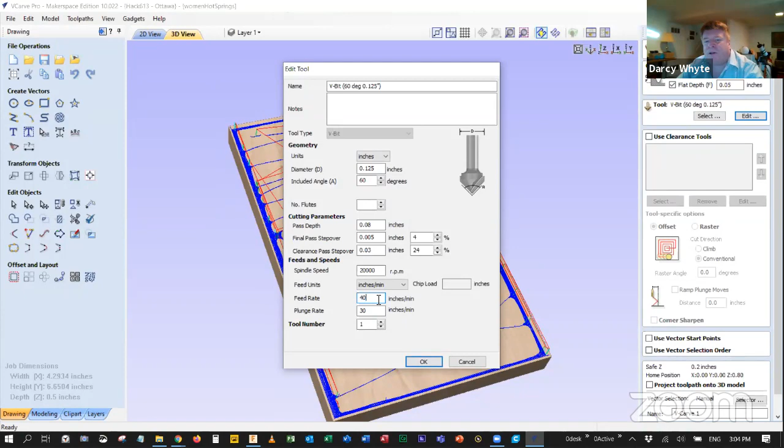So you could put a bigger number there and say, oh, well, why don't we try 70 inches a minute? And then come back and calculate that again. And then when I close and go find that button again, whoops, wrong button. I don't know what that does. So I'm going to hit escape and pray that it goes away. That worked. Now we're down to 31 minutes.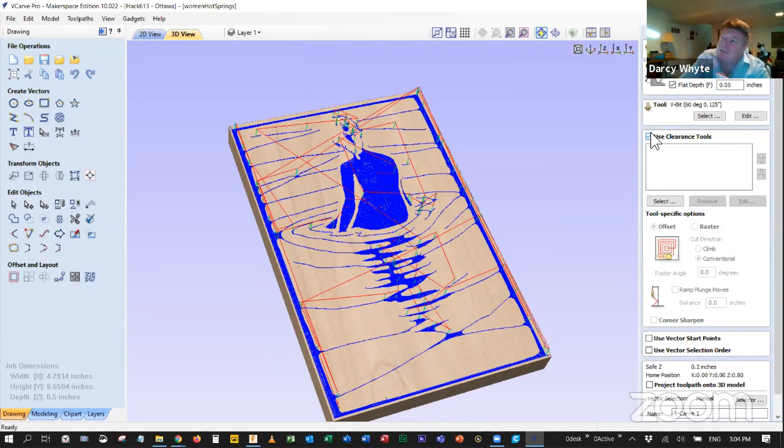But if you're really in a rush to get things done, on the toolpath which I made here, there's an option where I can say, use a bigger cutter to clear the big areas, and then use a fine cutter to get the fine areas. The big cutter will take no time, because it's bigger. So use a clearance tool. Select a tool for that, and you could pick a bigger, fatter tool, like a 1/8 or a 1/16, instead of the pointy V-shaped one.

I think this is a 1/16 tool, the one that I picked, and I'll tell you why I picked it. I could pick a bigger one, it would be faster, but the tinier one doesn't kick up as much dust. So it just sits there and the dust just stays on the spot. And I got a cardboard box I can put around it as well. You can put it on your back picnic table or what have you. But anyway, from here you just select a tool for that.

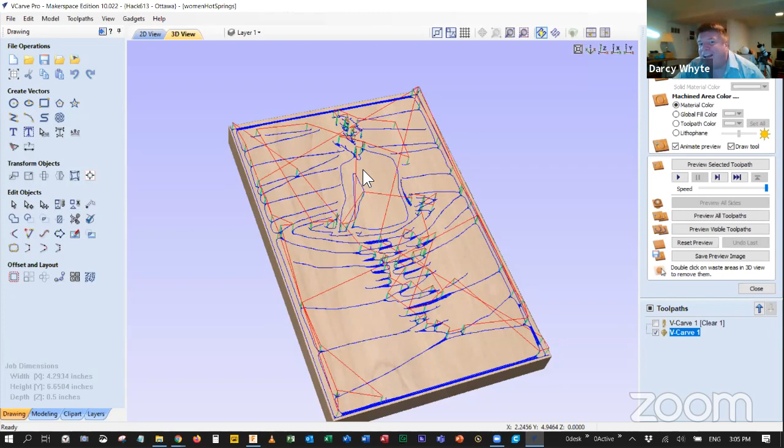And now when I calculate it, you'll notice that you get 2 parts. So when I check and uncheck, this is the fine work now that will be done by the fine cutter, and it won't take very long, as you can tell by looking at it. Before it was going to spend a half an hour going back and forth to do the background. But now the bigger cutter is being used for that. And the bigger the cutter you pick for this part, the faster that part will run.

So if you feel like changing your cutter in the middle of your job, you can, maybe that takes 1 minute if you get that mastered. Then you're down to about 15, 16 minutes from 30 minutes, you see? So that'll just be your own call that you'll make when you do this type of work. Do you feel like changing a cutter, or do you just feel like walking away and having a tea while it's cutting? So that's what your tool chain looks like.

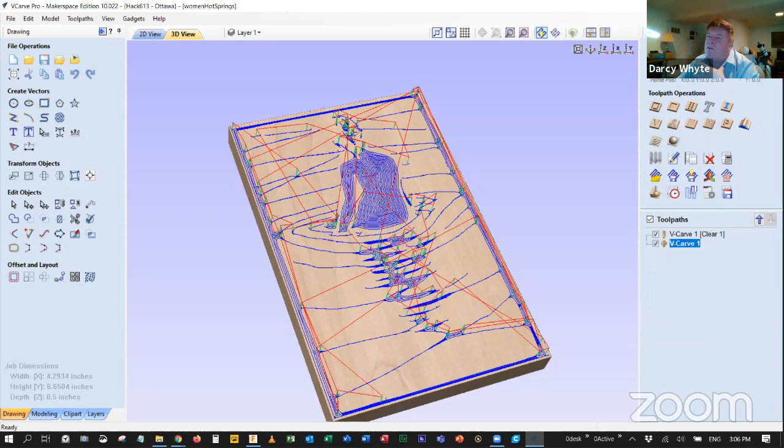So once you get this done, you'll just save this file. It says something's wrong, I don't know why, because I'm just going quickly, but I'll save that file. And now to run the actual machine, I'll get out of here and open up one of those files with Candle. My Candle's sitting under Active, Art, and then CNC Things, CNC 3018. This is the CD that it came with, and I think everything I need is in one of these folders.

It must be download. Here it is, software, and then the Grbl control. So this is the actual Grbl control.

And the VCarve Pro seems a little bit expensive maybe at first. So did you get it right away, or are there other options? I guess what you do in VCarve Pro, we can do it in Fusion. Okay, so I think Fusion is going to cover this for us, but I've been doing this for a while, and I happen to be using VCarve Pro because it's pretty good.

And I'll tell you that it is expensive software, VCarve Pro, but here's what's happened. We're a makerspace, Hack613. So I managed to fill out the application and got us the privilege of being able to get VCarve Pro at a reduced price. So I went out and bought it for our makerspace. Now, in terms of the way we run this whole show, what I encountered was no one wants to contribute. So right now I've got the software. In theory, as a makerspace, there's a couple of technicalities. This license is supposed to be in our makerspace.

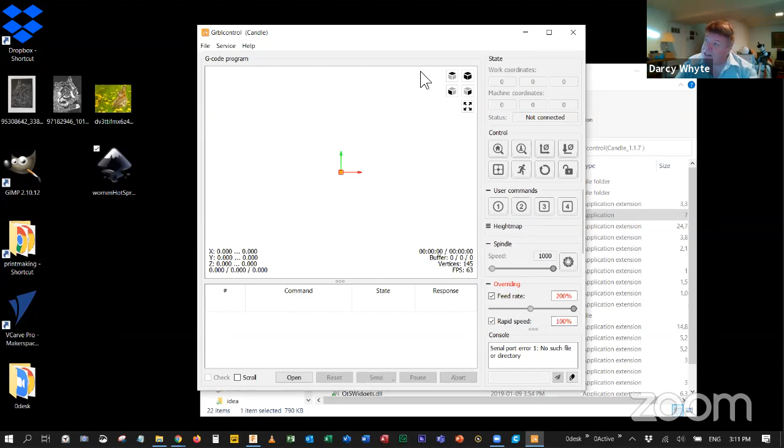And then there's an engrave in the manufacturing area. There's a tool that's the second from the bottom under the 2D and it's called engrave. He went in there and he picked a V-shaped cutter and boom. Even though on the screen it showed as square channels, because a V-carve shaped cutter was used, it does the appropriate fine move up and down. So I just haven't done that yet myself. And yeah, you're right. It's expensive software and it's good software. But there's a ton of options out there on how you can get from your CAD to your CAM. So in 3D printing, we call that process slicing. And in CNC, we call it CAM.

And now another really, really nice tool chain is SketchUp. Now, most of us in our group are moving from SketchUp to Fusion, but I should mention you can learn SketchUp really a lot faster. Like you could be up and going in no time. Like if I wanted to make something in SketchUp, watch how fast this is. And all the CAD and the CAM is all built into a plugin inside there. It's really lovely. So I'll just look for my SketchUp icon if I can find it in here.

I don't know my alphabet, so it always takes me a long while to find. It's right bottom right. Yeah. It's red. Next to the Google. Oh, there it is. Yeah, thank you very much. There. So we launched that.

So this is SketchUp Make, the Make edition, I think it's called. It's free. And SketchUp's $1,000, by the way, if you want to get the pro version. And so we start using SketchUp. And that's why I think this bulk buy is a good idea, because we'll all get a machine, we'll all build it together, and then we'll all do our first few jobs together and look at all these different software tool chains. And each person will have their own style of what they want to make and how they want to make it.

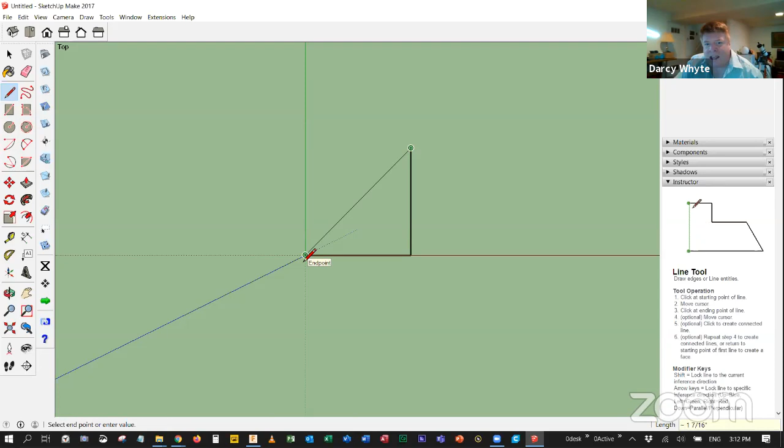So there's a guy there. I want to delete the guy. And then I hit the top of the house, so I'm looking down. So let's say I want to make a 1-inch square. So I'll get down here with my pencil, drawing a line. I'll cross there and I'll type 1 inch. So that's now a 1-inch line that I just made. And then I'll come here and I'll type 1 again. And now that I've done that, I can snap to that corner and make my 1-inch square. Done. So then I get the move tool. I'll just shift it like that. So then I go and I use this plugin here.

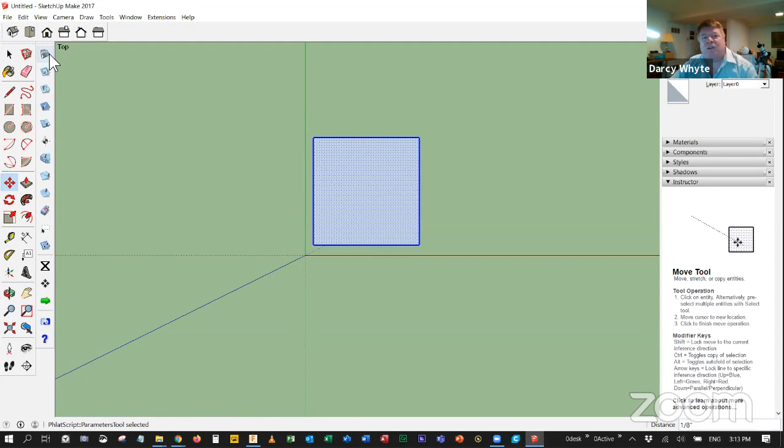This is a plugin called SketchUCam that's free that you just download and you add it to SketchUp. And it gives you CAM ability. So what I'm going to do is first go to the top button. Here I say things like how thick is my material and which cutter am I using, right? So you just fill all this in. This is an overhead gantry and la-di-da.

And then you'll come and you'll pick this outside cutter and you say, I want an outside cut on this guy. There. So that is, in fact, a finished product. And if I want to pop a hole in the middle of that, I'll go get the hole circle, put that here, pick the next tool down over here, which is the inside cut, hit that. That's an inside cut hole. That's an outside cut on this outer part.

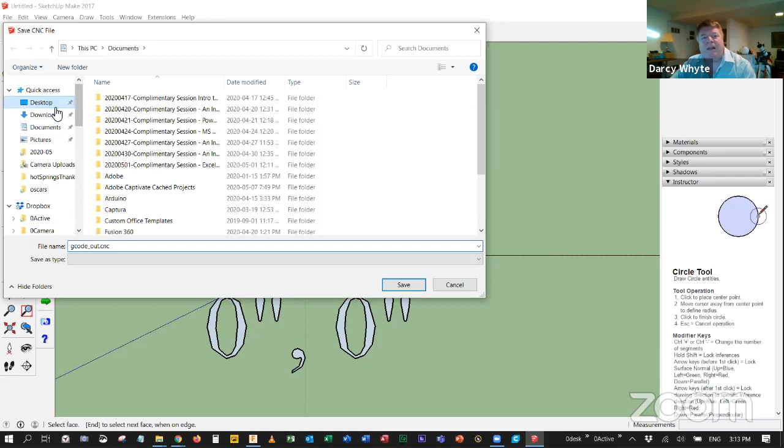And then from here, there's a green button. You hit this, and it now creates a file. And it's called G-code out, and I'll just put demo. That CNC file now that it just generated, I can go into the software called Candle, if I can find that little guy. I find Candle. This is Candle.

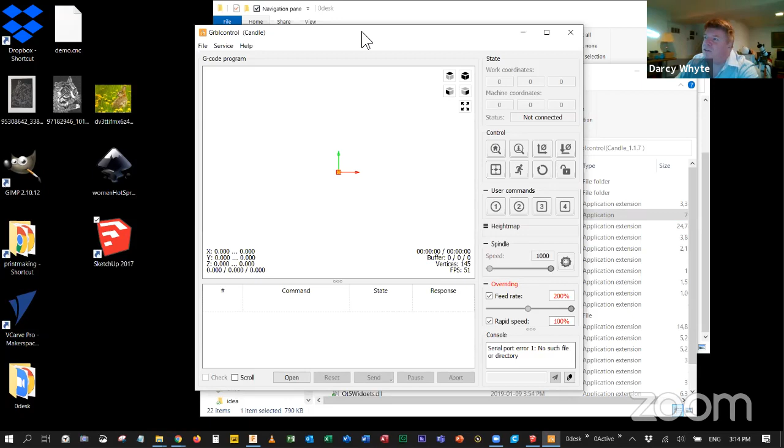This is connected directly to your machine through your USB. You'll be going in service settings and picking the COM port that it's connected to because it's a physical plug-in onto your USB. But you'll just simply do file, open, and you'll grab said file. Mine's on desktop there, and I'll put all files because I got a weird extension. And there it is.

And so once you've come this far, you'll just be hitting go right there. It's off because my machine is not physically connected. I'll be hitting that button and the spindle will start up and this part will appear before my eyes. So that's what the software tool chain can look like.

Oh, sounds good. One of the reasons I'm interested in that size of CNC is to mill some PCB boards. Is that something that's realistic? Absolutely. In fact, with this particular machine, and Doug's more of an expert on PCBs, and he's coaching me on how to make circuits and things like that. You can definitely make PCBs on these machines. And there's even a feature in here. I forgot where it is in the buttons over here. And I've tried it and it works beautifully.

And you click that feature and you attach like an alligator clip to the cutter and you don't start the spindle. And the machine will go around and it'll probe. Yeah. Okay. And it'll make a map of the surface, and then it'll adjust the G-code, because when you're doing a PCB, you want to cut the exact amount out of there because you're often using a V-carve. So it really is sensitive to variations in the Z axis.

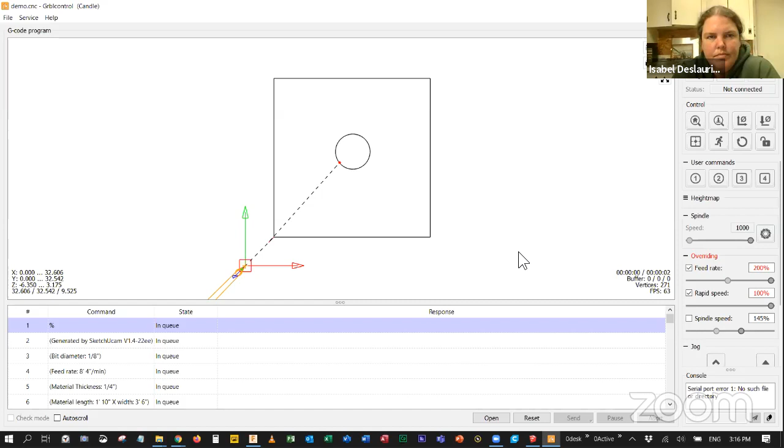So what people do is they just run a Z probe and it'll go around, 5x5 probe or whatever you define, and then it'll adjust your G-code and it'll follow the contour, even though you built your cutting path on a flat plane. It'll fix that for you. And I've tried it all out and it works like a charm. And so the machine does have enough precision to do that type of work.

So the idea with the alligator clip is you're conducting across the copper. Absolutely. Yeah, and on that controller that I showed you earlier, there's 2 pins there somewhere, I don't remember if they're labeled, but I had to research it, I think. And then you just have ground and then another pin, and you just connect one of them to your PCB and the other one to your cutter, and it'll go around and touch the PCB like that.

Okay, well, I'm in. Okay. I guess one thing, when I looked at these before, I quickly got lost because there's just so many of them. Yeah, I know. Do you think you'd be able to advise on... I'm kind of afraid to do that because someone buys a bum machine, right? I know. When you buy something on eBay or any place, sometimes you have to return things. And so what I'm trying to do here, okay, so is my screen still up? Yeah.

So I'll go back to that internet thing. And I'll tell you, if I was buying one right now, I'll show you exactly what I would do, okay? And I've done this twice successfully already. One of the machines arrived with a dead board, you know, the little PCB board. It was dead. So here's what I did. I called back the maker and I said, look, the board's dead. And he says, okay, I'll send you another one. And he did. Now, of course, they're slow. They're coming out of China.

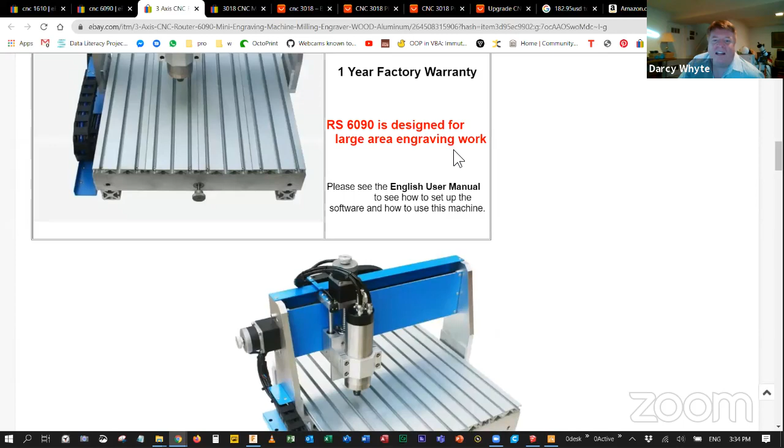And the picture doesn't even look like a 6090. That's not even a 6090 they're showing. So this is a bogus listing of some kind. They got 100%. I don't know what's going on, but it scares the hell out of me.

6090, maybe it is. Oh, there it is in Canadian. But when I clicked it, it was only, okay, that's US, and then that's your Canadian. So you're looking at 3,500 minimum, 3,700 entry level for this machine, right?

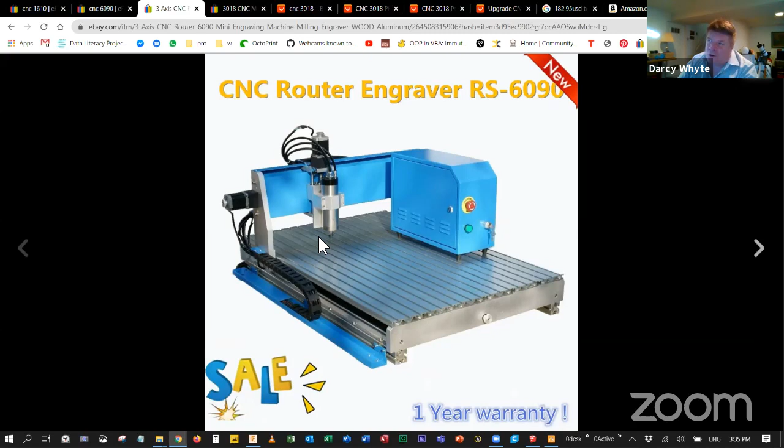But you're starting to get some higher. You got this space. Here's what you're looking at. You're starting to get over 10 centimeters finally. When you get to this size of machine, you're going to get 10 centimeters, even 20 centimeters if you get a nice one. I've seen these machines like this one, you're going up in price, another cheap one. That's a little over the budget there. Yeah, that's getting crazy. But they're sweetheart machines, these.

But here's the problem with buying a 6090. They're heavy, okay? If you buy a cheap one, it'll go DHL. But if you buy one of these that's not cheap, it won't go DHL. It's over DHL's limit. So DHL won't touch it and Canada Post won't touch it. That means they're going to ship it to the nearest port, and you'll have to do logistics from the port. You're going to pay fees for all that. It has to go to a container port, and the Port of Montreal is the closest one. That's going to be more cost to factor in.

I went through that once when I bought my laser cutter, and recently I tried to buy one of these 6090s, and I couldn't even get the guys to quote me to my door. They just said, we'll go to Montreal, and after that's your problem. That's the best I could come up with. And these days, the logistics are more solvable. There's companies that take care of this.

There's some of these 6090s that have really high, here's a pretty high one. You see that? Even the gantry comes up pretty high. These ones come from Europe, actually. When you see this color, they're usually from Europe, and this color usually comes from China. Although they're sold out of Europe, they might be made in China. I don't know. Okay, so when you get to this, that's going to be a challenge because most CNC machines are designed for cutting sheets.

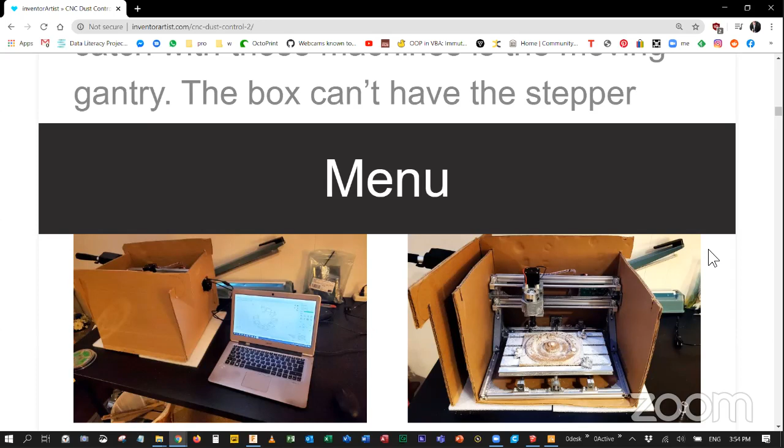I was trying to click the X on the screen. Yeah. What's that? People keep trying to mouse onto your screen. Oh, you were trying to use the X on the screen. Yeah, I just took it away so it wouldn't be so confusing. Yeah, there.

There. Yeah, so these are real concerns, but I found that the value of these machines is so high, I'm ready to take on all that stuff. Out in my West End, you know how I deal with dust? The CNC machine's got a dedicated room and I close the door. Oh, okay. Well, that works too. Yeah, I go in there once in a while and I shovel the dust off the floor. Really, that much of it? Yeah. I've had to shovel it. That's how bad. Because that's a lot of emptying the vacuum. I just say let it lie where it lies, and you just pick it up. Yeah, exactly. That works.

Cool. Well, this has been hugely entertaining and informative at the same time. I'm really excited. Now I just want to go start shopping and try and figure out which one. Yeah, I definitely want one. I just have no money.

I can lend you money. I'll lend you money. You want to buy stuff? No. Down that road leads danger. Lending, with high interest and remote access. You wake up in the middle of the night, you'll be making earrings.